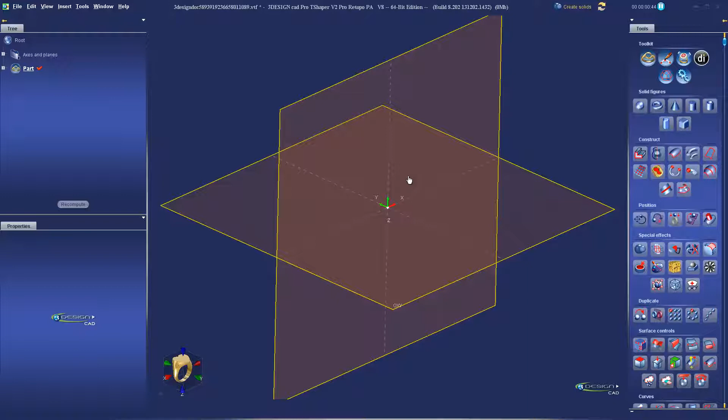In this video, we're going to take a look at building an award ring with parametrics in mind. So today we're going to be making an award style ring or a class ring, and we're going to keep parametrics in mind. We're going to build it up to the point where it's fully parametric, and then you can always fill in the details, adding all of the little flourishes and settings and stones and things at the end if you'd like.

So let's go ahead and get started here. We're going to use the Signet builder for this. I'm going to jump to the jeweler's bench and click on Signet ring. Okay, so we're going to set up our Signet ring. The first tab is the shape of our signet.

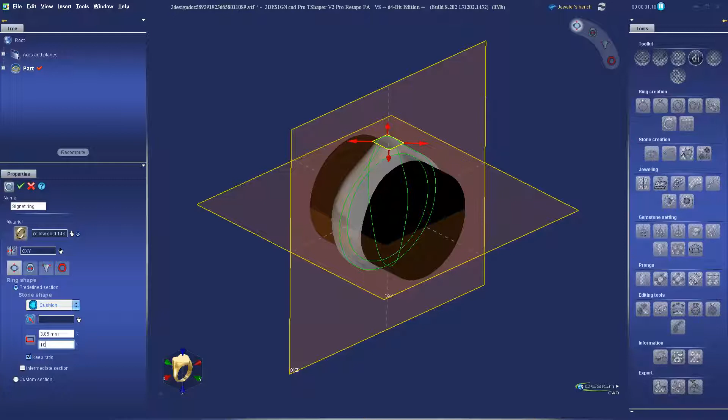I'm going to use a predefined shape, so I'm going to use the stone shape. We're going to go with a cushion shape for this one. And we'll set our size. I think I'm going to do 10 millimeters in the Y direction, keeping the ratio for the rest of it.

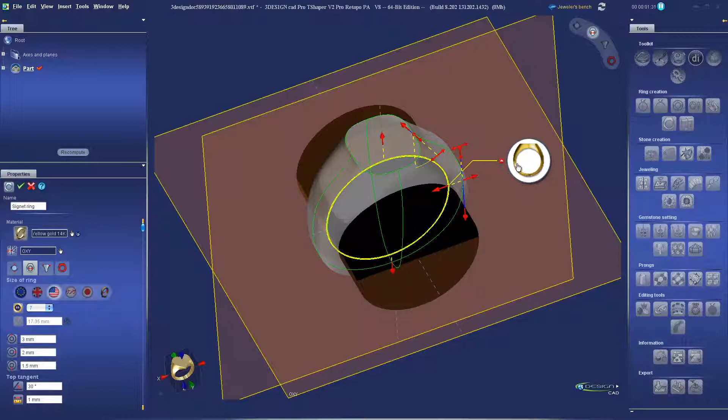And that's it. We'll go ahead and set the size in the second tab. I'm going to start with just a basic size 7. And then also in this tab, we can set things like thickness and tangencies. You have a little hotspot shortcut. If you click that, it'll take you right to the view you're working in.

And we'll adjust the thickness. Kind of play with the tangencies a little bit, just to kind of give it the shape we want. So you can experiment with that. It doesn't have to be exactly like mine for this one.

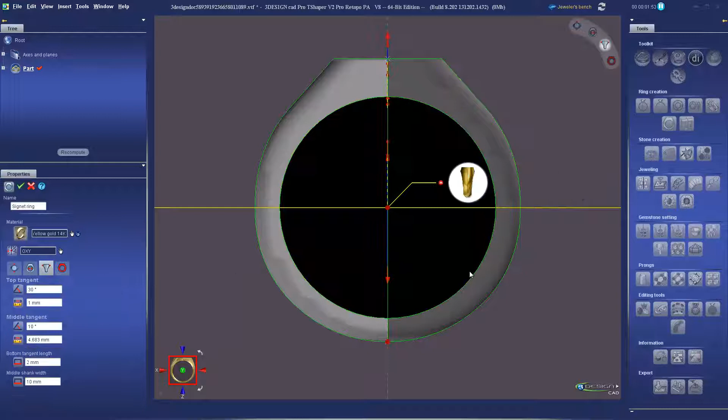Same thing for the third tab's the side view. You can make any adjustments. I'm going to leave the default here. I think I'm happy with the shape as it is. And then the fourth tab would be the carving or scooping. We're not going to do that on this ring.

So that's pretty much it. You can choose a material. I'll stick with what I have in here, yellow gold, and validate. And you get a lovely little signet ring ready to go.

So one thing I like to do, I'm going to make changes to this later, and I don't want to have to dig through the tree to find this original signet ring. So what I'm going to do is I'm going to select it, and then back on the solid module, we'll do a clone. Okay, I'm not going to change any settings. I'm going to clone it right in the same place, and then I'll hide my original signet ring.

That way later, this is still at the top of the tree. If I need to make a size change or change the shape of the signet or any of those parameters, we can jump right to it instead of having to dig through all the tree to find it. Any changes we make to it will update to the clone as well. So we're going to work on the clone.

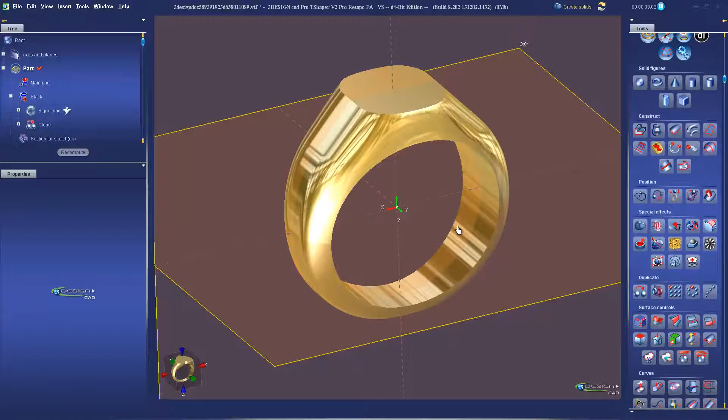So the next thing I want to do is set my stone, my center stone. Now the Signet builder doesn't use a ring size builder, so it doesn't have the plane on top. You can create your own planes and get the same effect. So to do that, we're going to select the ring. Down in the support section, a couple of options we have for creating planes.

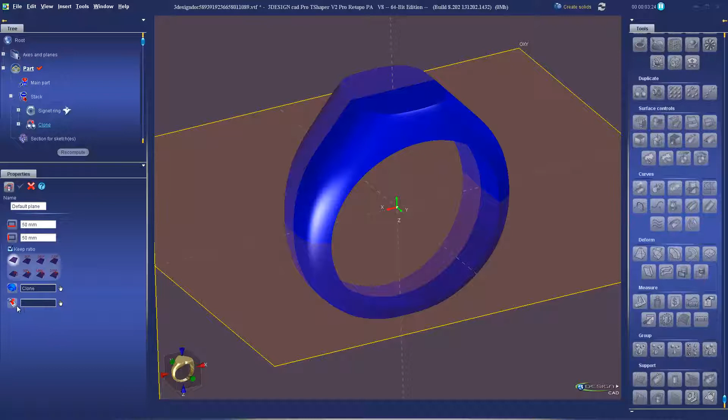The one I want to use here is an implicit plane, so that's this icon here. What we need to do is we have the support selected. We need to choose which side of the object we're going to place the implicit plane on, and in that case, it's going to be this top surface. And the reason we're using this is this top surface should always be there, that little flat surface.

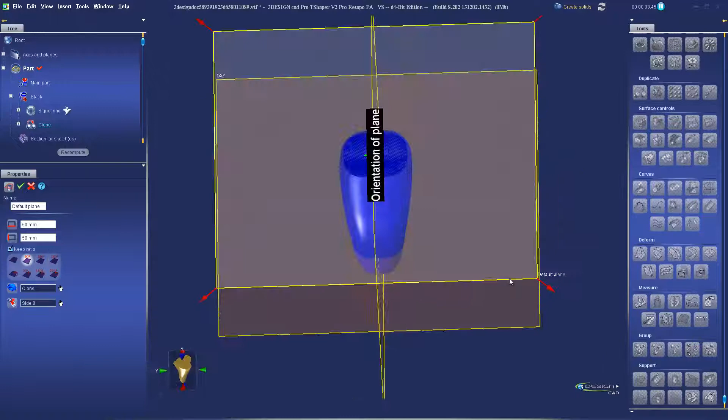So we don't have to worry about this changing so much that our surface gets mismatched. So the other thing we might want to do is adjust the orientation of the plane so it's facing the front of the ring, be 270 in this case. And I'm going to make it a little smaller. It doesn't need to be 50 millimeters. Make it about 10, and validate that.

Now we have a plane to build our top stone on. So select that new plane and create your stone. I'm going to use a cushion as well for this to match the shape of my ring.

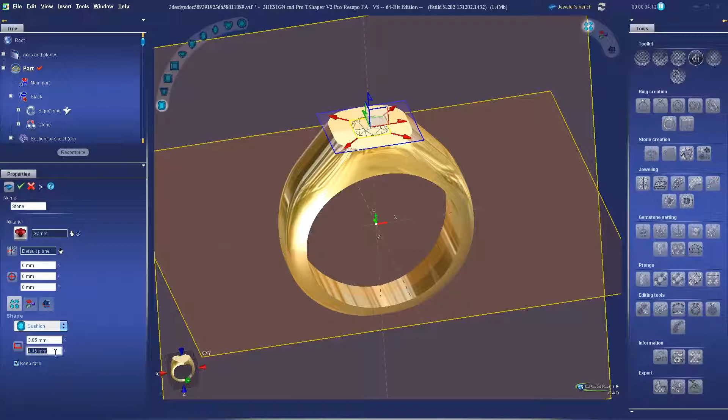And the size is going to be 7 millimeters along the Y. Again, I'll keep the ratio so it has the same ratio as the signet ring. Now, of course, if you're building this from a very specific stone, you'll want to pre-measure those and set it up a little differently so it all matches. I'm leaving about 2 millimeters between the edge of the stone and the outside, so you can use that as a rough estimate.

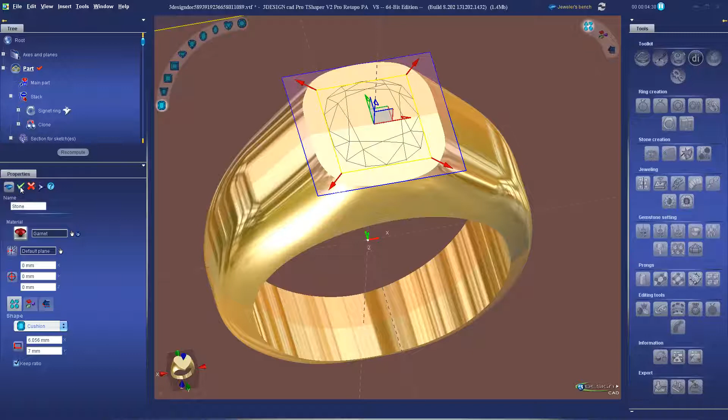So we'll choose the material. I have a garnet in there. That looks good, that's my birthstone. Validate that. So we may notice I've set it a little low. Let me go ahead and raise that up. I'll just double click back in there and we're going to go up about 1.5 millimeters.

In the Z direction. So now we need to build our bezel up to that. I'm going to go ahead and hide that plane for now, we'll come back to it later. And we're going to do some extraction for edges. So down in the curve section of the solid module, we have extract curves.

Now, when you're extracting these curves, we always want to keep things in mind when we're doing parametric designs, that we avoid using edges that could change later. If I change the shape of this stone and I only select this edge and this edge separately, those edges could get mixed up later.

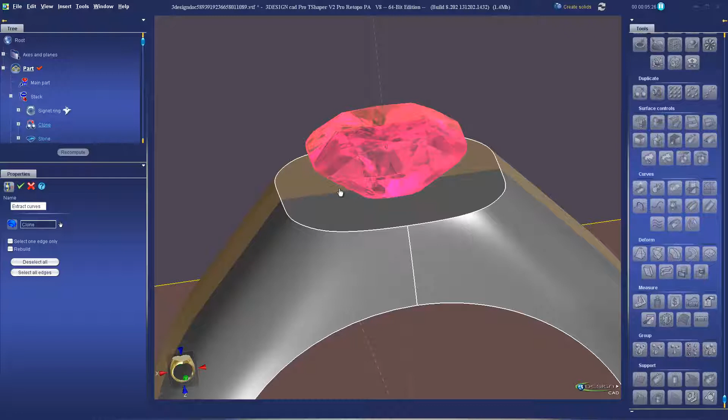So what I want to do is select the surface in between those edges instead. By selecting this surface, it's always going to be there. This flat surface will always be chosen, so no matter what number of edges are around here, it will get selected. So that's an important step. Let's go ahead and validate that.

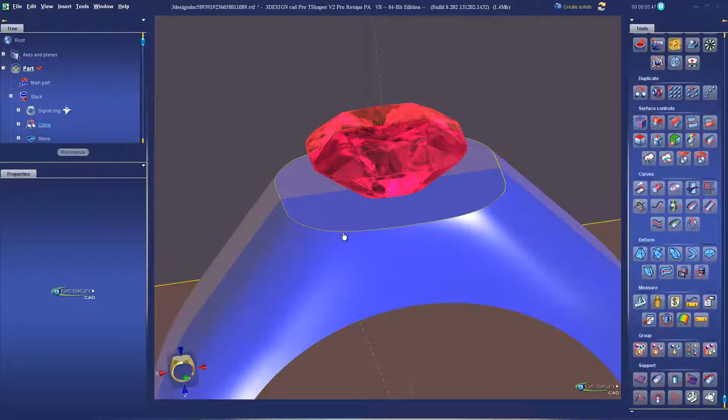We have our first edge. To get the second edge, we're just going to clone the edge we started with, the extracted edge. I'm going to move it up about 1.5 millimeters. And actually this one needs to be a little bit higher than the stone because we need to have it sunk in a little bit to set. So we'll move it, let's go 1.75. That looks good, validate that.

And now we need to make this smaller so we get a nice taper here on our bezel. So we'll just go to the Move, Rotate, Scale tool. And I'm going to scale it down also about 1.5 millimeters smaller. So that would be 8.5 in the Y direction, keeping the ratio. And oh, not quite enough. 7.5, there we go.

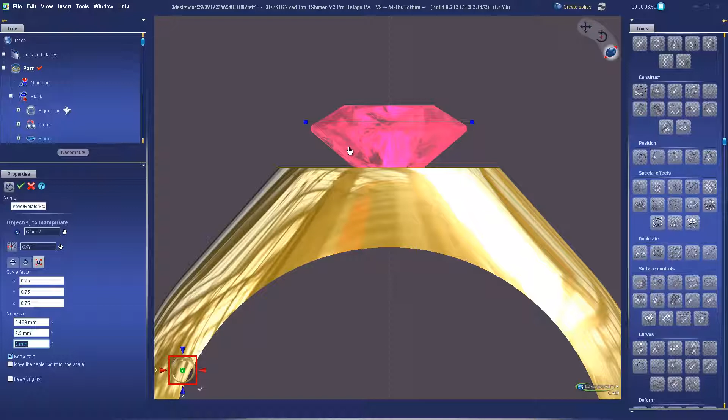So just keeping in mind how much thickness we're going to have between the girdle and the outside of our bezel. You can always make adjustments to these numbers. Your stone may be a different shape or size, so you'll have to play around with this and do some pre-measurement if you want to get this just right. You also want to keep in mind what size stones you're going to be setting around the bezel, so you may have to adjust all these higher or lower. It's all parametric, you can always go back and adjust these.

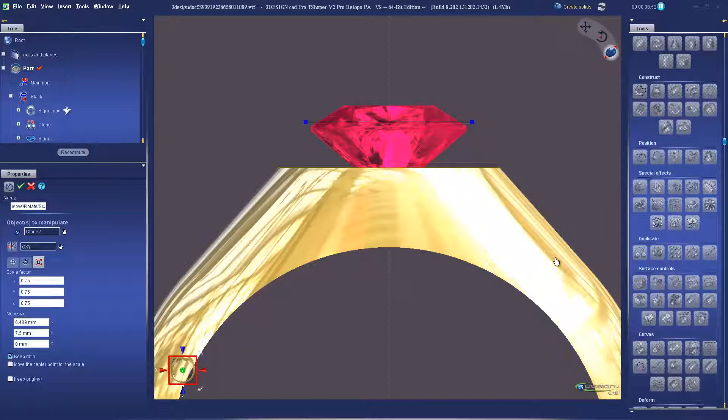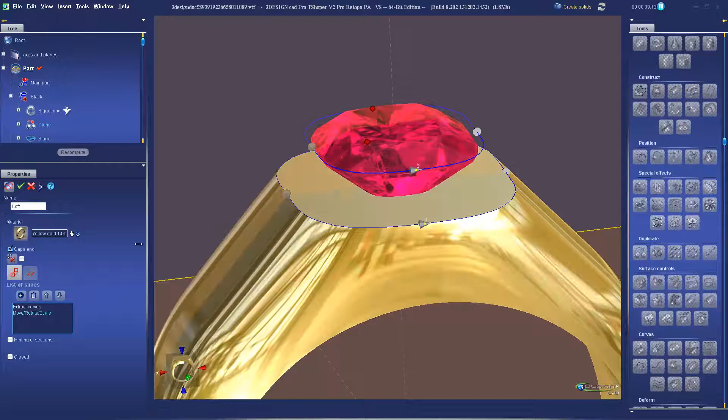Okay, so we can go ahead and validate that. And now we have our 2 edge curves. We're going to do a simple loft between these two. So select them both, and then lofting is in the construct section. Click on that. And if we're doing a multiple path loft, more than 2 paths, we'll have some settings to set up, but if you're just doing 2 paths like this, it's a simple loft. No changes to make, you can just go ahead and validate. It's going to loft between the two, giving you a solid.

Okay, now we simply Boolean add those two together. So select them both, Boolean add, and there's our base ring.

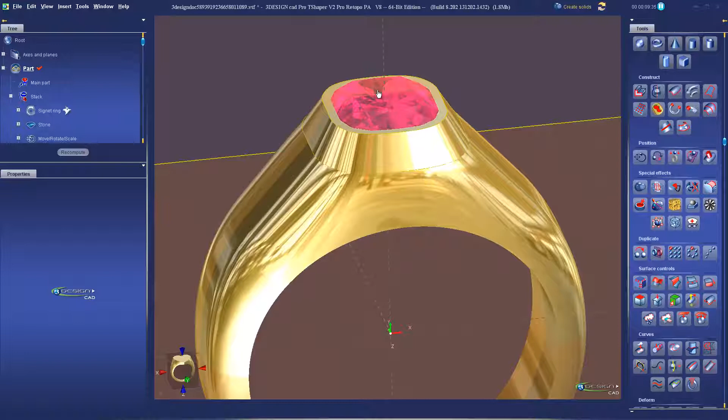Okay, for the stone seat, we're going to go ahead and set that up, and this will also give us a chance to hollow out some of this. So like a traditional class ring, we're going to hollow it out underneath the stone as opposed to doing a scooping underneath. You could do a scooping and hollow it out if you really want to save some weight, I'll let you play around with that. We're just going to do a hollowing out from the top using a stone cutter.

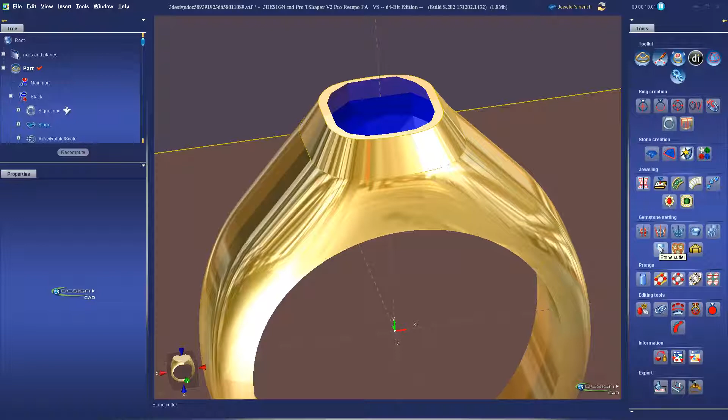So to the jeweler's bench, select the stone, and just a single stone cutter in this case. And we'll freeze my ring so we can see inside. And we'll go ahead and set this up. So the shape tab, shape is fine, we're good with that. We go ahead to the parameters, and we're going to adjust

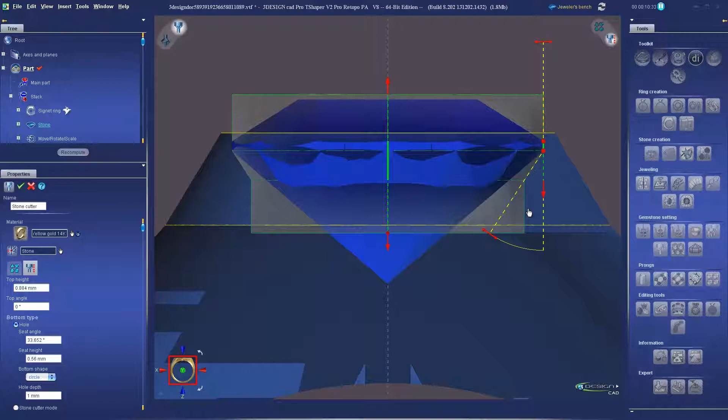our angle for the pavilion, and then also bringing this up. This bottom arrow will make the hole underneath wider, so we can bring it up quite a bit. We just need a little bit of a seat here. The rest we can bring down from the bottom, and this is going to allow us to really hollow out underneath that stone, so save some metal.

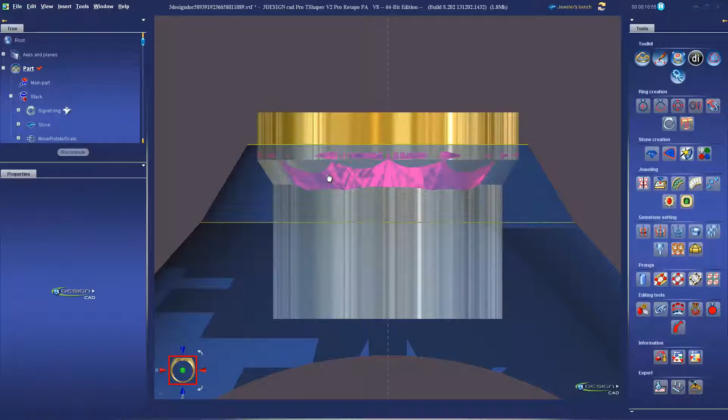So make sure you leave enough thickness at the bottom here. You can measure that if you want, or I'm just going to eyeball it so it doesn't get too thin after polishing. And validate. And then we will unfreeze our Boolean, and then just a simple Boolean subtract to cut that out of there.

Boolean subtract, validate, and hide my stone for a second so you can see - we get a nice beautiful seat, it's all hollowed out underneath. The ring still looks solid otherwise.

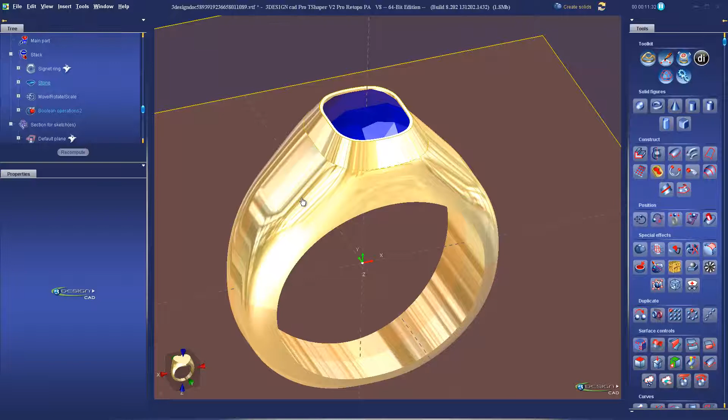So we've got our top stone set. The next important part of our award ring is the panel on the side. That's where we're going to set up our letters, text, and any embellishments or designs that we want to put in there.

So let's set that up parametrically as well. To do that, we're going to base it off of that plane we made, our default plane here. This plane is going to move up and down as our finger size changes, and we want the plane we work from on the side to move up and down too. So we're going to create a new plane based on this old default plane - just a regular plane.

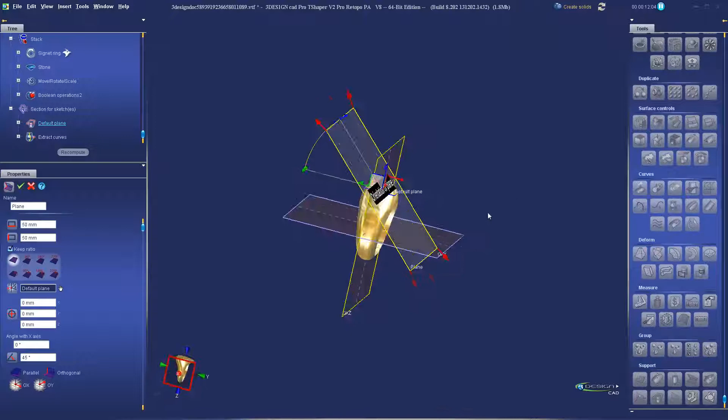You see when you click on that, it places the plane in the center of that default plane, so now we can make our changes to it. We're going to rotate it 90 degrees to this side - you can do it manually, or better, go over here and change the angle with X to -90.

And then from a front view, we're going to move the center of that plane right down here on the edge of our ring, right about where we want the center of our panel to be.

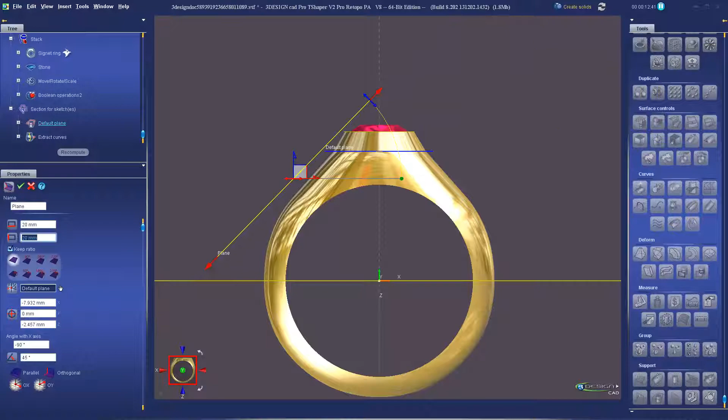Okay, again we can resize this - I'm going to say 20 millimeters for this one. It doesn't need to be so big, so it's easy to see on the screen all at once. The orientation is already correct, so we're good to go. Go ahead and validate that. Now this is linked to this plane here, so it's always going to move accordingly.

So we're going to sketch our design in this new angled plane that we created - right into sketch mode.

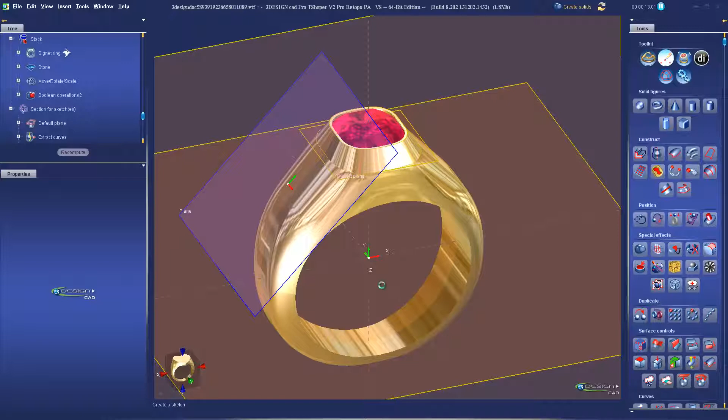My panel is going to be a shield shape, so I'll use a symmetrical vertical curve and just draw that in. You want to make sure it fits on the side of your ring - don't make it wider than the ring. Something like that.

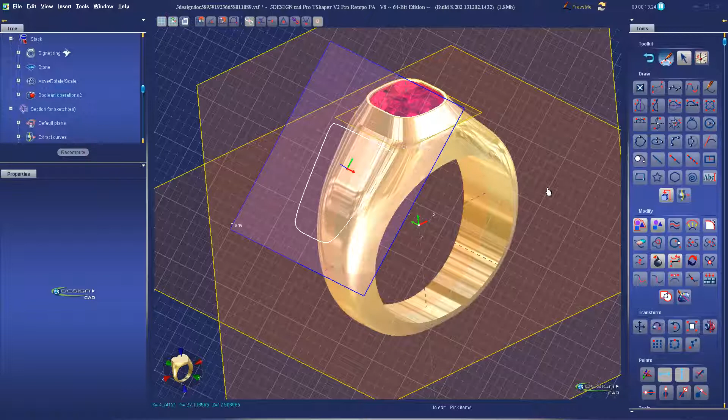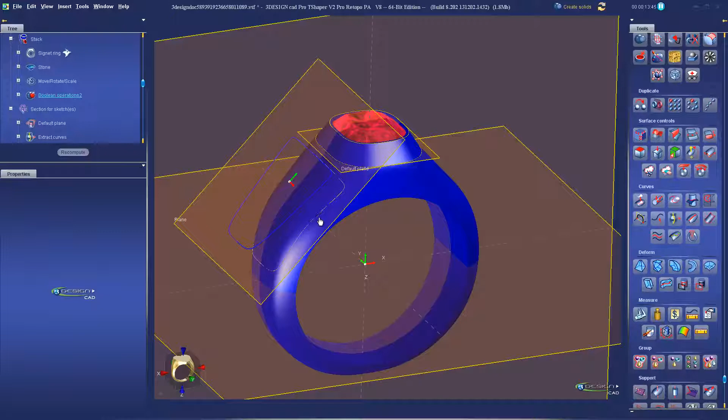Exit out of the sketch, and we can go ahead and project that curve onto the surface of this ring. Select them both, and in the curve section, the very first tool is curve projection. We're doing a straight projection in this case. Make sure that this blue arrow is pointing from the curve to the ring - if it is, you're good to go. Go ahead and validate, and now we have our panel line on the edge there.

Now to create the solid from that, we can't do an extrusion because it's a non-planar curve, so we're going to do a surface pullback.

Surface pullback in the construct section. The amount we're going to cut is on the inside of the ring. We're not sure which is the top or the bottom of this curve, so what I like to do is put the same amount on both sides - I'm going to go a quarter of a millimeter deep, so I'll just put 0.25 on both the top and the bottom. It doesn't matter how much it's sticking out on one side or the other, as long as it's the same on both sides. And that gives us our panel.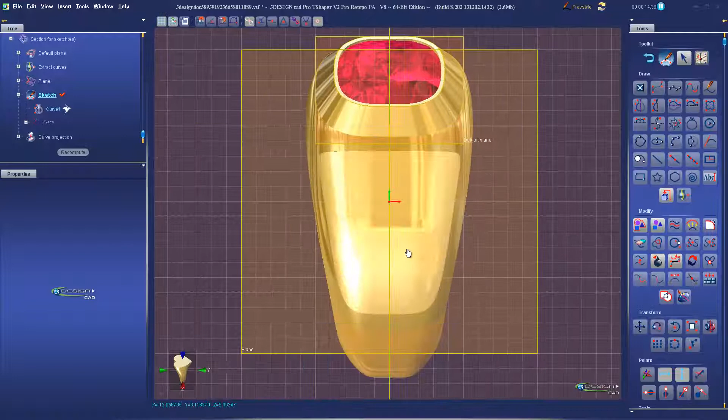We'll cut that out in a little bit, but I want to show you another trick I like to do with lettering. So I'm going to go back to that sketch with the shield shape curve in it, and we're going to set up our text.

For the font, I recommend using blocky letters if you want to keep them nice and clean and clear for printing and casting and all that fun stuff. But you can experiment with other fonts - any fonts you have on your system can be used.

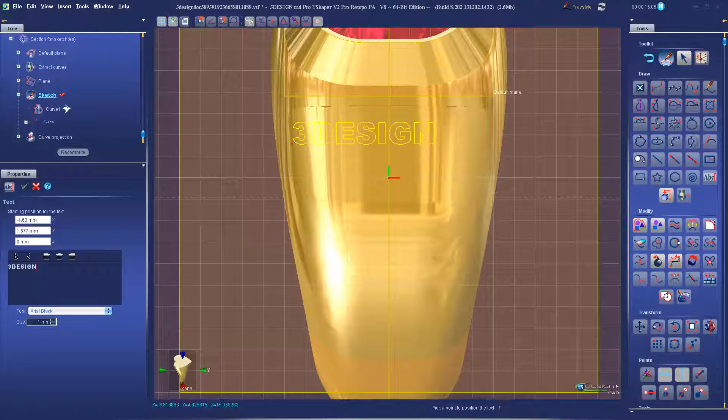I like to type in the text before I lay it out. So if you type it in first and then run your mouse over the screen, you can now move this around. This is 7 letters long, so I'm going to just line it up to the middle of the S, like so.

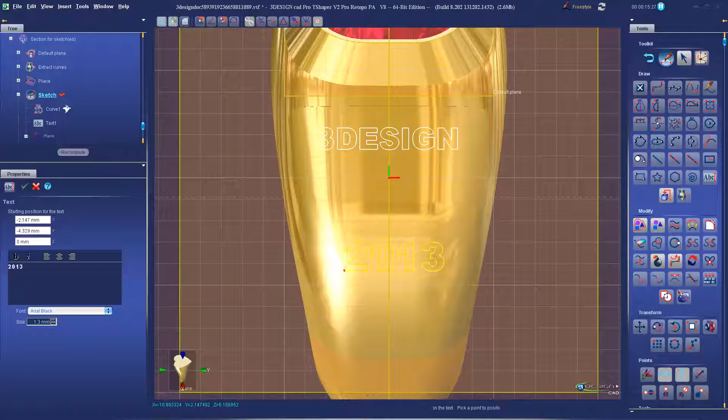And then I'm going to do another one down here at the bottom for 2013. You can put whatever text you want in these. I'll make this one a little bigger, placing it right between the four letters like so.

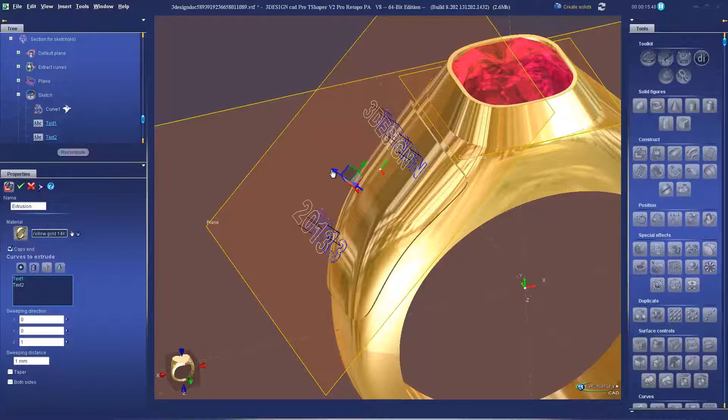And then we're done again with the sketch, so exit out. Now this time we can do an extrusion. We're going to extrude our letters through our cutout. So if I select both of them, do an extrusion, I'm just going to grab the Z arrow and push it through to the other side of the cutout. And validate, just like that.

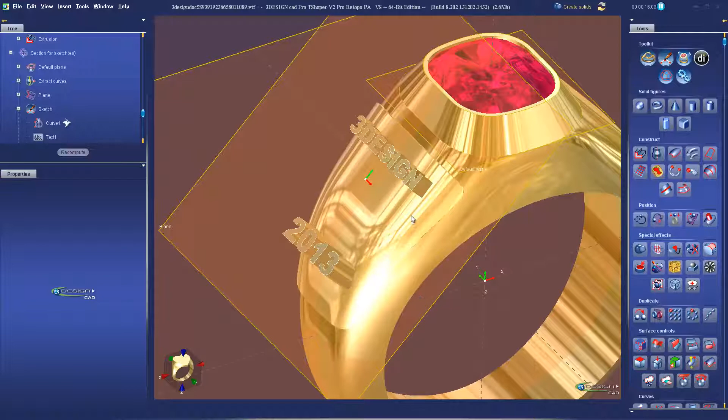So what I want to do, instead of trying to place these letters after I cut this surface out of here, we're going to cut the letters out of the surface, which will leave the negative space sticking out. So you'll see that here in a second. Go ahead and subtract the letters from the cutout. Boolean subtract. And we see we have our letters cut through there.

Now for the other side, if you're going to be using the same text, the simple way to do that - you don't want to do a mirror. If you mirror it, your letters will be backwards because it is a mirror. So what you can do instead is a rotation.

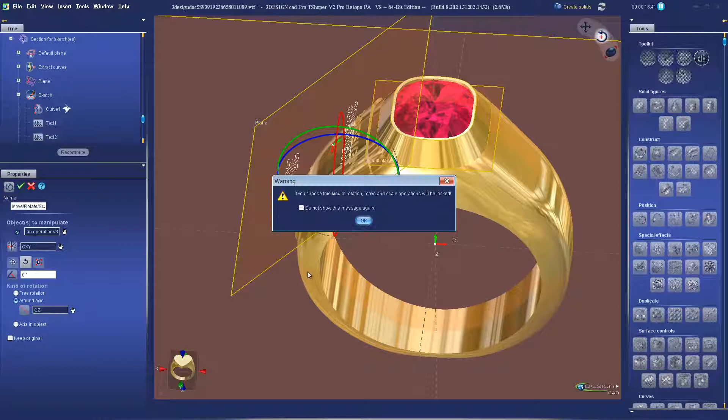So use the Move, Rotate, Scale tool. Switch to Rotate. Free rotation will spin on itself. We want to go around an axis. It's going to lock move and scale - that's okay. And we're going to do 180 degrees on the Z axis, which is the default. So that's going to spin it around to the other side, which keeps the letters the way we want them.

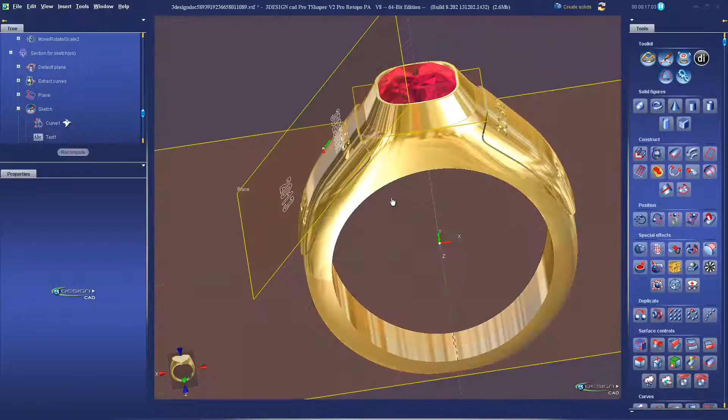Keep original - we still need the original cutout - and then validate. So now you've got your two panels ready to go. So again, we'll do a simple Boolean subtract.

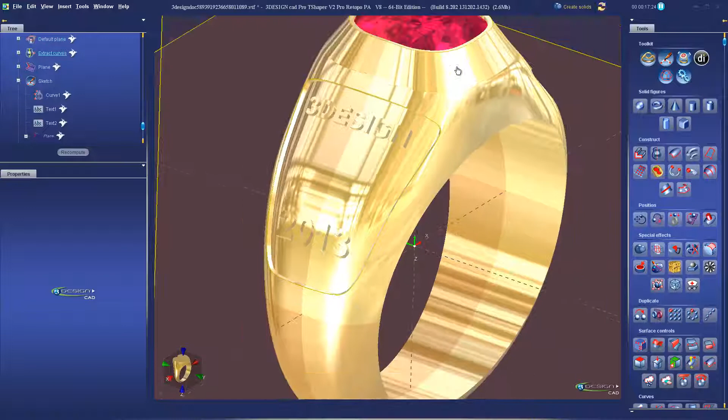Select the ring first. Subtract Boolean. And there we go. Let me hide some of these curves and planes for you. So we see we have our letters cut out. They are shaped exactly like the original surface because we use that negative space.

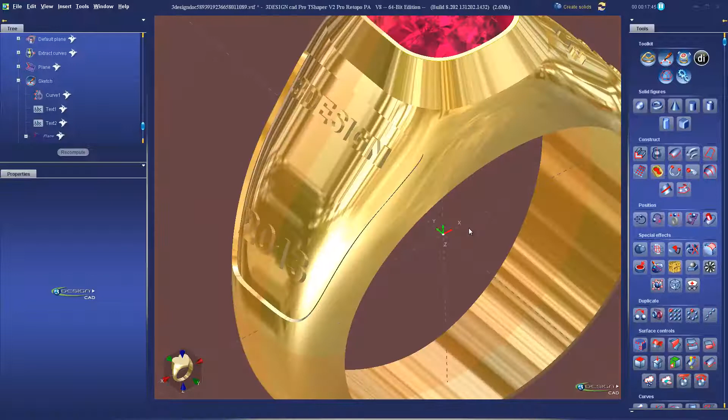So we don't have to worry about trying to deform or warp these letters. They're already in there. So nice little trick for you. So this is

pretty much it for the design. Everything we've done so far is parametric. You can go back and change your shapes. Remember, if you change your stone shape, you're going to want to change your signet shape as well. So both of those here at the top of your tree. There's the original signet we started with. You can change your font and lettering by just clicking on text 1 or 2 here.

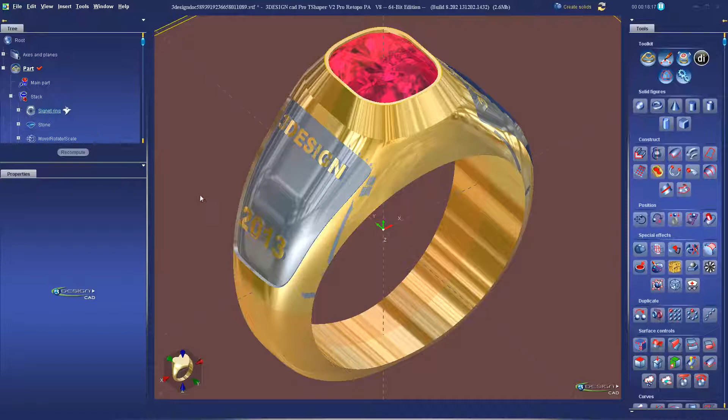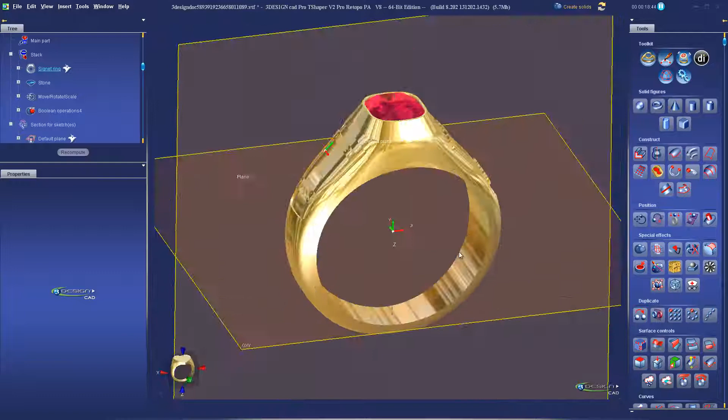And we can change the overall ring size, which would be the easiest change. So let me show you that one. We go back into our original signet. Let's try a size, let's go up to a 10. And we validate - everything needs to be recomputed, you see. And there we go, we get the exact same signet ring. Everything is lined up, same sizes, with just a new finger size.

So from here, you're going to go and add your details. So if you are making a line of these rings, you want to save your file at this point and then generate your different sizes that you're going to need, and then you'll add your details on there. You could make the channel around here parametric if you'd like. So you can do that before you save off the file.

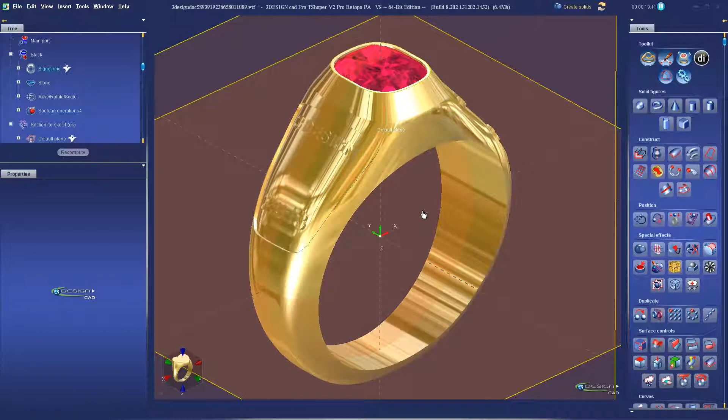Anything else you're going to want to do after the fact - so if you're going to do any filleting on edges, things that don't stay parametric, you're going to want to do after this point. So I'll open up and show you where I went with this one so you can kind of have an idea of what you can do with it.

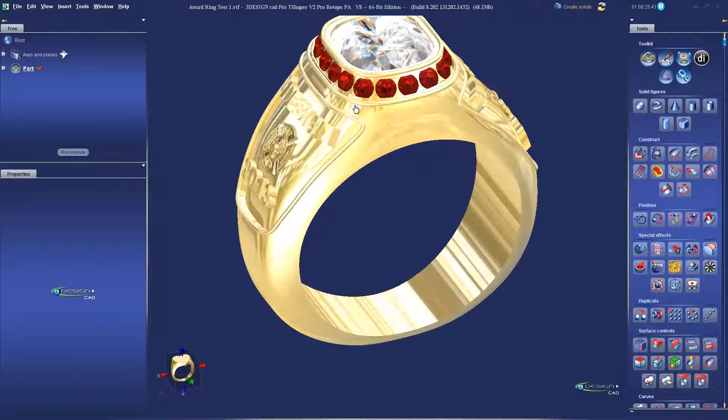So I've taken and I've created a channel around here. I've added a little piping on the edges for some detail. These are things that will be difficult to do with parametrics. And then I just threw a clip art on the side. This is a type art object that I got online.

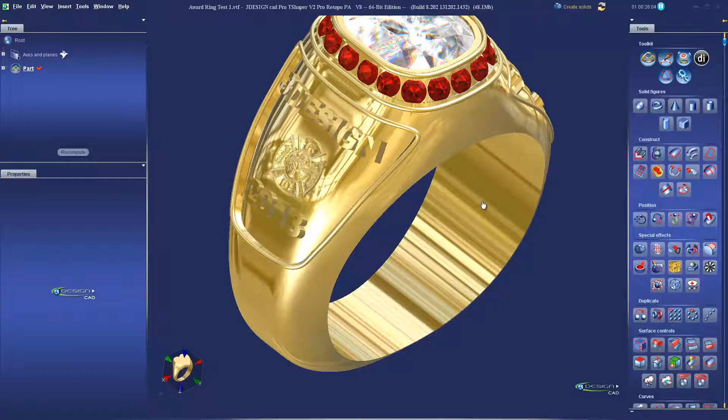If you have TypeArt, you can create those, or you can get them from Vector Clip 3D, or you can use TShaper to build your designs on the side. Do a UV wrap and unwrap to get that to match the surface. So lots of fun stuff you can add to your rings.